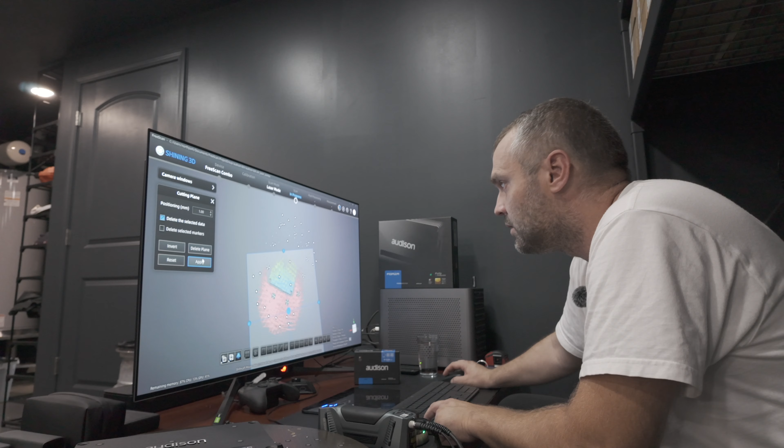So let's get moving. Once I scan just a little bit, I want to delete the plane, because right now you could see on the computer it actually grabbed some of the table. So what I'm going to do is cut plane by markers. You just got to select the markers that are located around the perimeter of the thing, create plane, and apply. So there we have it.

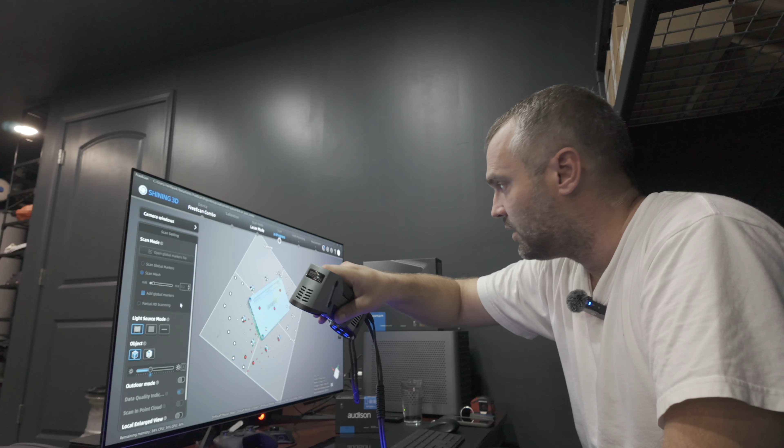Now I'm gonna scan, and I shouldn't have more than what I need. It should just be scanning now, just the amplifier. And as you can see, it's close to almost done. I just gotta kind of scan everything at an angle because of these holes, I really wanna grab the holes there. Now I could rotate it, and my 3D scanner with the angle markers is doing a good job right now scanning the sides.

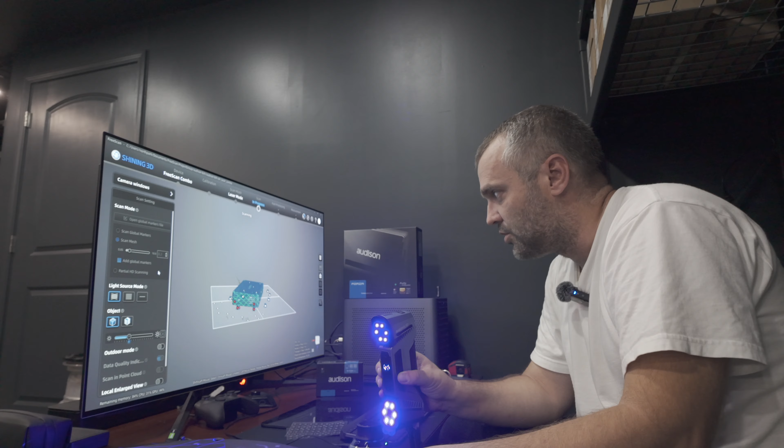So when I designed this enclosure, I think I got to make a valve, because when these amplifiers are going to heat up, typically there might be pressure buildup inside. So I'm going to make a valve where it kind of allows pressure to come out of there.

So I think I completed one side. After that's done, that process is pretty quick. After that's done, what I need to do is create a new project. Now, once I created that new project, what I could do is flip it around now.

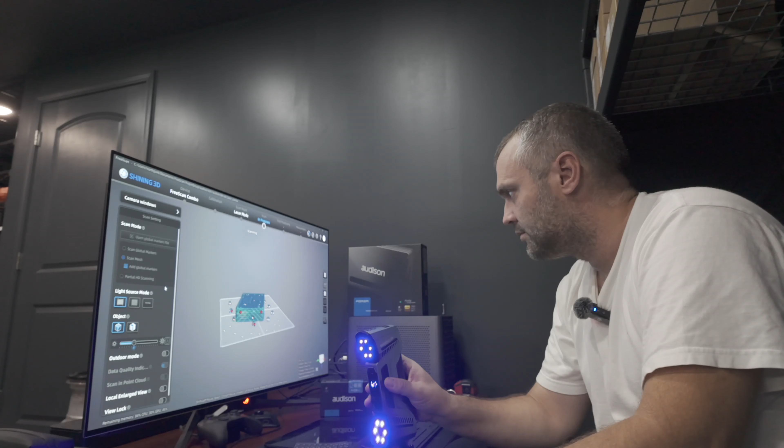Well, pretty much wrapping up on that one. And now, all I gotta do is...

Combine those together. So you go to alignment, you select both projects, and you have to align the sides. So you want to rotate these amplifiers so they kind of are looking the same way.

And then manual markers alignment. So what I do is I select markers and it gives it numbers, so 1, 2, and then I'll rotate to the side. On this side, I'm just going to select 1. And then on this side, I'm going to probably select 2.

Now I'm doing a lot more than I should. I really technically only need to do just 3, but I'm just gonna do 6 this time. And it's just gonna align them together. So there it is.

Looking good. Looking really good.

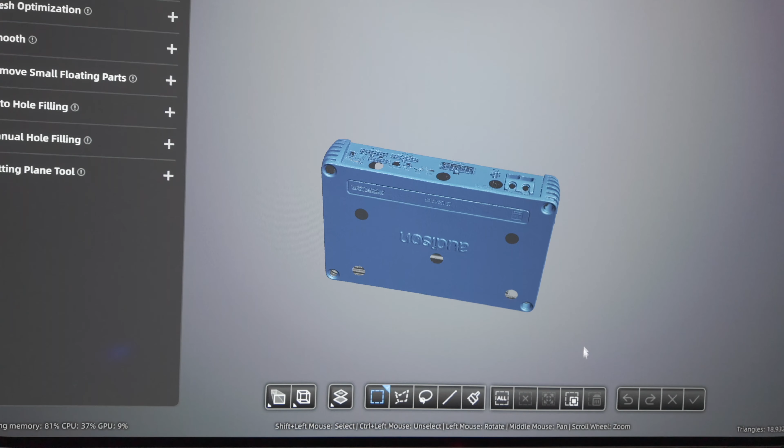And there it is, ready to start making an enclosure where that's gonna sit in. So after I do that and I figure out all my wiring, then I'm gonna rescan it when it's plugged into everything. That way I could understand naturally which way the wires are going to want to sit.

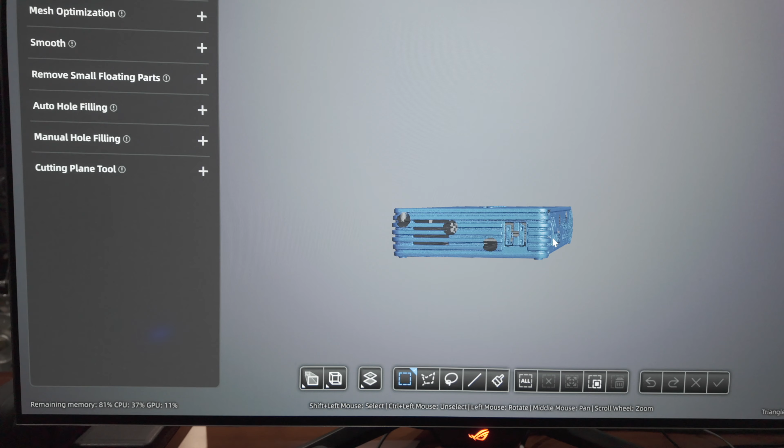So whenever I create ports, I want it to naturally go into the holes to come out the other end, because I haven't figured out every single wire. I know I'm going to use an optical, and then I know a couple other things, but until I get there and actually do it. So that's why designing is going to be for later.

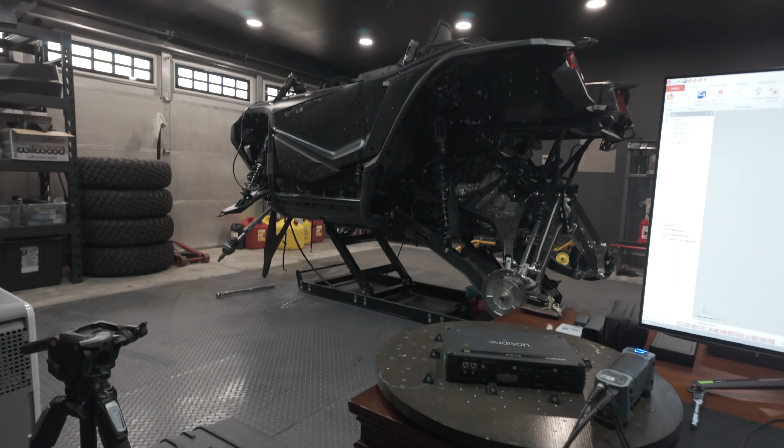This is not just for me, because eventually one day this stuff will be in one of your cars. So you're not just watching something that I'm doing for myself, because right now, yes, I'm doing everything for myself, but believe me, I want to have better than anybody out there, but at the end, you're gonna have it too. So, talk to you later.